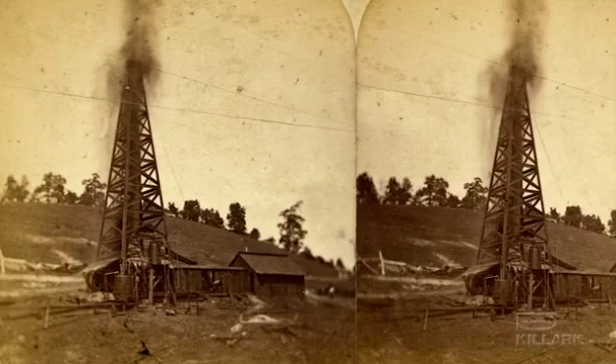Since the earliest days of harnessing the energy available from the commercial development of petroleum resources, understanding the science of fire and explosion has been critically important. Advancement in the process industries that deal with the extraction, refining, and transformation of petroleum, as well as a wide range of other flammable manufacturing materials, has created an ever-increasing demand for controlling the flammability risks.

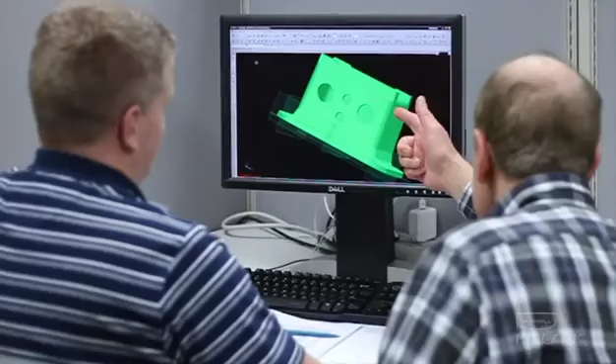One distinct area of concern has been that electrical equipment and its wiring could provide the source of ignition for explosive mixtures. Thoughtful engineering analysis, techniques, and specialty equipment would ultimately be required to effectively manage these risks. Over the years, many industrialized nations worked within their own economies to develop a national consensus on how to evaluate and classify the risks associated with the extraction, processing, and handling of flammable materials in the presence of electrical systems.

The United States, often in collaboration with Canada and Mexico, developed a comprehensive set of rules for evaluating and classifying the risk of ignition from electrical sources in those areas that could have explosive atmospheres. This activity also produced regulations for the techniques and equipment to be used for these installations. They were then firmly aligned with the specialized product standards that were simultaneously being developed by consensus among industry engineers, technical committees, and third-party certification agencies.

The North American approach for classifying the explosion and fire risks in these hazardous locations, frequently referred to as the class and division method, has been collected into a chapter of the National Electrical Code, or NEC, as well as corresponding Canadian and Mexican codes.

Meanwhile, there were also alternative methods being developed in other parts of the industrialized world for dealing with these locations. Certainly, the analysis of the actual risk of fire and explosion would yield the same fundamental results, regardless of approach. But it is the method of classifying the risks and the engineering solutions applied that would introduce additional options in the development of electrical systems. Even though the underlying science would be the same, application of the principles to real installations requires detailed technical knowledge of the standards, codes, and procedures that are unique to a specific national jurisdiction.

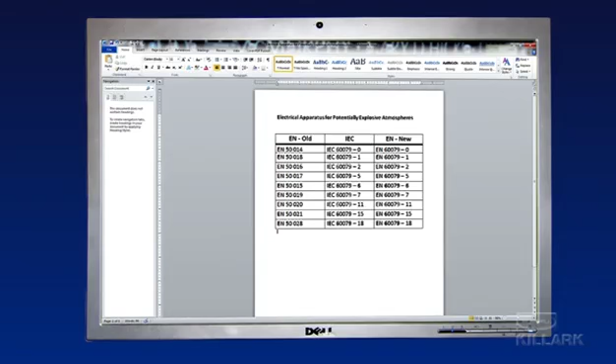Largely based on the work of CENELEC, the IEC created a series of standards for explosive atmospheres that have now been embraced in a revision of the Euronorm standards, including renumbering for consistency with the IEC documents. An additional effort toward international harmonization was the creation of a comprehensive assessment program that could be used for implementation.

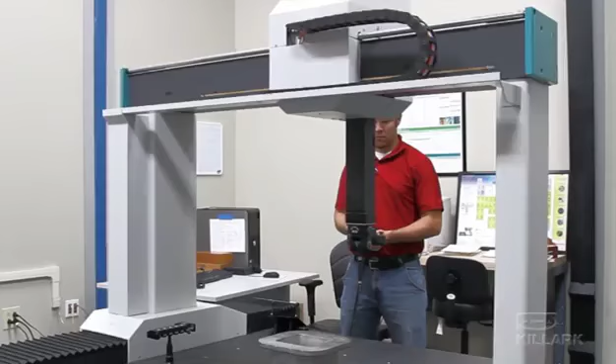Known as the IECEx scheme, it provides a structure for authorization of certification agencies, called notified bodies, to be available to conduct examinations of products and manufacturing processes. The notified bodies would also conduct evaluations of the manufacturer's quality systems and controls, including the scrutiny of follow-up audits. The all-important test reports and certificates of conformity issued by these agencies provide the documentation for product nameplates and marking.

Support for global harmonization continues to grow. The UN, through its Economic Commission for Europe, promotes and encourages adoption of IEC standards and the IECEx certification scheme among the Commission's 56 member countries. And in North America, IEC standardization has also received validation. Although the United States, Mexico, and Canada may be at different stages, revisions to each country's national standards over the past several years have included the path toward harmonization.

For the United States in particular, progress toward harmonization led to the adoption of two new articles in the National Electrical Code, Articles 505 and 506, as alternatives for treating hazardous locations. These articles are very much in line with IEC standards.

Part 2. Treating the hazardous location. There is no doubt that challenges can always be lurking in the details, but a clear sense of the underlying principles for dealing with electrical equipment in hazardous locations can bring them to light. The fact that the science and much of the equipment theory and technology are so similar between North American and IEC systems makes resolving the points of difference quite manageable and the transition less difficult.

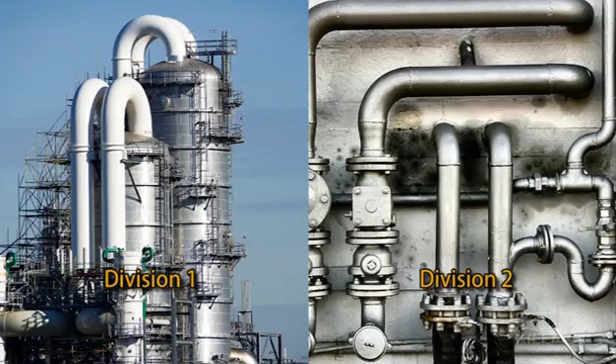The first, Division 1, includes locations where normal operations could permit the flammable material to form ignitable concentrations in the atmosphere, either some of the time or perhaps even all of the time. In contrast, Division 2 describes locations where hazardous materials are stored, handled, or processed in ways that are unlikely to create ignitable mixtures when everything is operating normally.

IEC 60079, the principal underlying standard for harmonization, uses a similar concept for categorizing risks, but it splits the risk of ignitable mixtures during normal operations into two separate categories. Calling the categories zones, the IEC approach starts with Zone 0, defined as those locations operating normally that could create ignitable concentrations of gases or vapors continuously or for long periods of time.

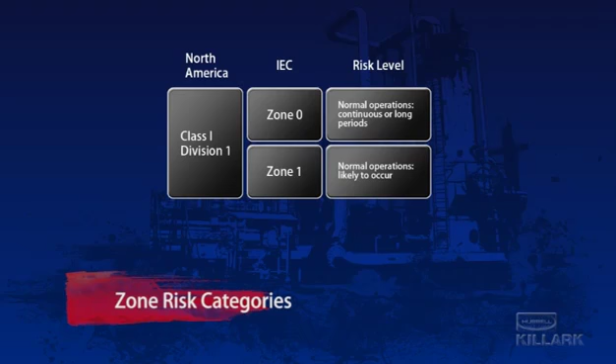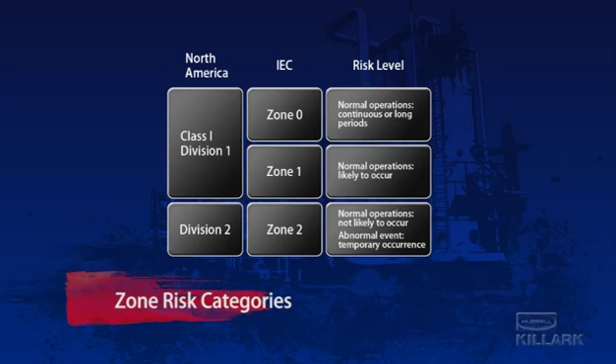Secondly, there is Zone 1. This zone could still be expected to create explosive concentrations during normal operations, but not often enough or long enough to require a Zone 0 designation. The final zone, Zone 2, is identical to its North American equivalent, Division 2. Explosive concentrations are not likely to exist in the atmosphere under normal operating conditions, but failure or abnormal circumstances could cause a temporary risk of a flammable atmosphere.

While the intention of the risk categories is certainly clear enough, those with the responsibility for conducting site evaluations or plan reviews to determine which risk category should be assigned often prefer to use a more quantitative analysis. There are unofficial numeric parameters that frequently serve as guidelines in the classification process.

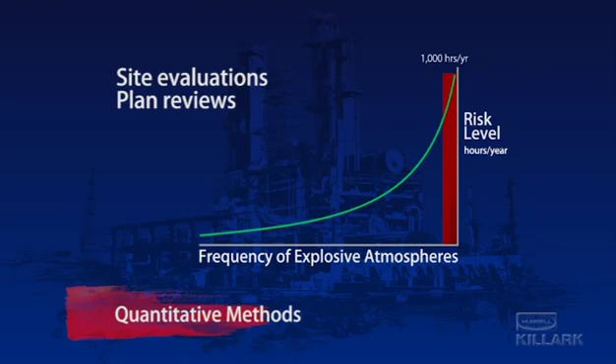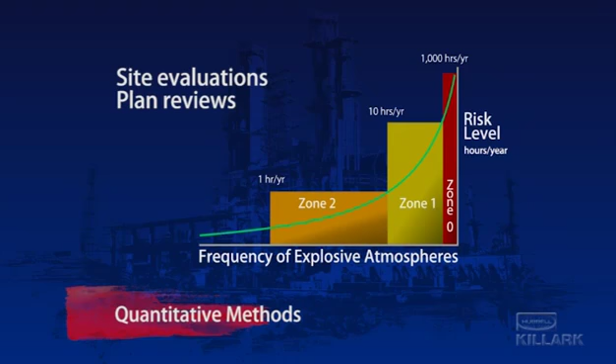When the occurrence of ignitable atmospheres exceeds 1,000 hours per year, the risk would be judged to be Zone 0. Locations that were considered to be Zone 1 could experience explosive atmospheres between 10 hours per year and 1,000 hours per year. And under this method, when the issues occur less than 10 hours per year, the designation would be Zone 2. Of course, these parameters must be adapted to local practices, experience, and circumstances.

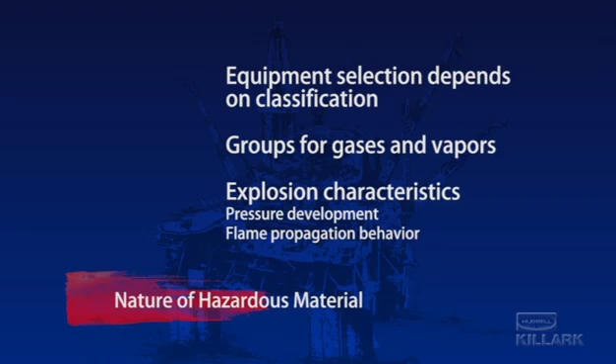Since it has a very important impact on the equipment that will be selected for the application, the risk analysis or classification of the hazardous location must also include information about the nature of the hazardous material that could be present in the atmosphere. Gases, vapors, and flammable liquids are assigned to groups based on the similarity of their explosion characteristics to the typical material used to represent the group. Within the North American class and division system, Group A is represented by acetylene, Group B by hydrogen, Group C ethylene, and finally Group D includes materials comparable to propane.

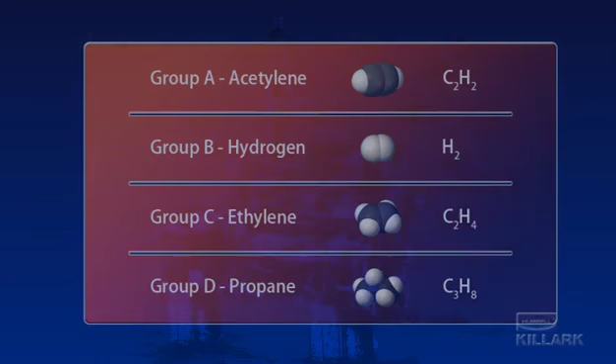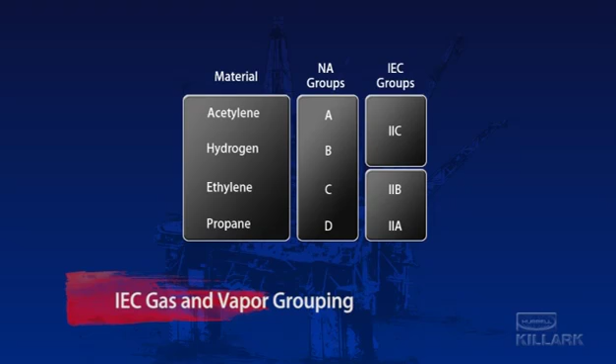The zone system has a similar method for dividing these hazardous materials into groups using the same explosive properties, but the letter designations are the reverse of those used with divisions. And in this case, both acetylene and hydrogen-type materials are pulled together under the designation IIC. Materials similar to ethylene are Group IIB, and those that have explosive characteristics corresponding to propane are designated IIA. The Roman numeral II, appearing before each letter, indicates that these groupings of gases and vapors are not the result of underground mining. The special requirements for mining use the Roman numeral I.

Arcing and sparking that could result from the normal operation of electrical equipment is certainly a potential source of ignition, as is component failure. But there are also many types of electrical equipment, lighting fixtures, for example, that can produce sufficiently high temperatures to become a source of ignition. For this reason, a full risk analysis must also include information about ignition temperatures of the gases and vapors that could be present. Both the division and the zone systems use identical temperature codes, although the zone system relies on fewer steps.

Part 4. Methods of protection and equipment for gases and vapors. Recalling that the fire triangle brings together the three essential components for combustion to occur: fuel, oxygen in the air, and a source of ignition, it is now possible to begin addressing the explosion potential identified during the risk analysis. A variety of approaches are available for the design of these specialized electrical installations. These are made possible by the alternative protection techniques that provide equipment options for the specific hazardous locations.

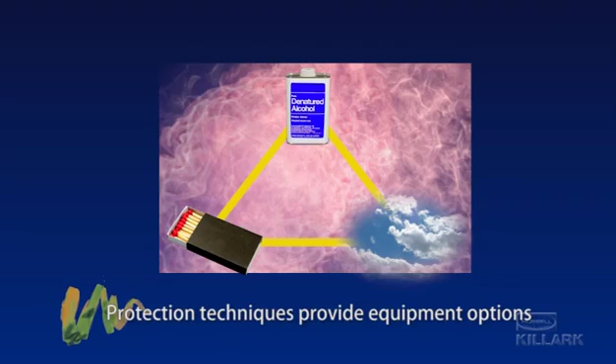The range of protection techniques can restrict the presence of the combustible mixture, isolate or reduce the energy of the source of ignition, or safely contain or quench combustion that could be initiated by the electrical device. Within these general approaches, there are 4 basic concepts of protection, each with one or more engineering solutions. The individual solutions have been assigned a simplified type symbol to make identification and specification easier and more consistent.

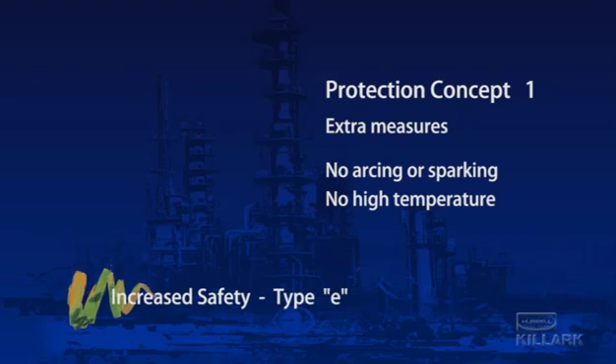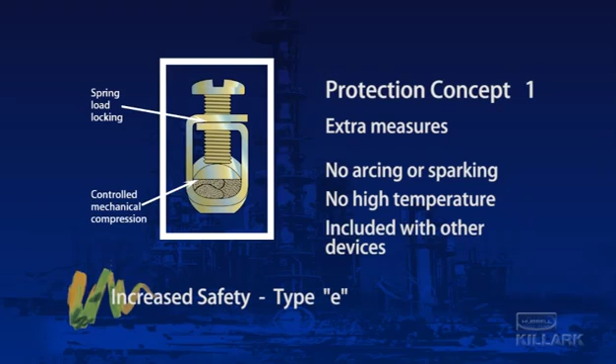The first concept includes equipment that has been constructed taking extra measures to produce no arcing, sparking, or high temperatures. These are known as increased safety devices, type E. The use of additional clearances, spring-loaded terminations, and physical protection provide a method that can be applied to standalone terminal and connection boxes, or in conjunction with other methods, such as those used for controls, motors, and lighting fixtures. Another approach has been developed around the concept of containing, quenching, and safely venting